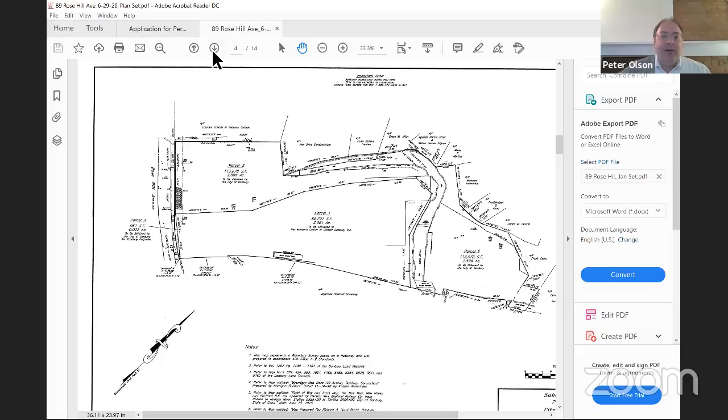All of the activities on our site plan, shown on plan number 5, are within 200 feet of the Still River, and therefore are all regulated activities. However, we're not proposing any work in the Still River except as Abigail will detail. The wetlands themselves are just right along the edge of the river, so it's the river and a tiny, tiny bit of additional wetlands next to it.

The remediation plan was overseen by a licensed environmental professional pursuant to plans approved by both the state DEEP and the Department of Economic and Community Development, who provided the funding for the city to undertake the remediation program.

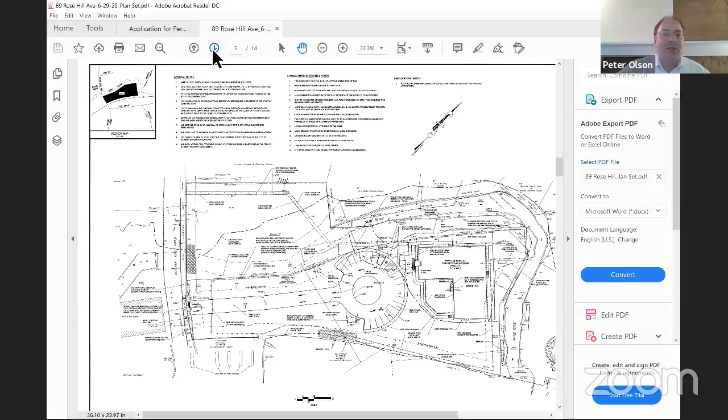So with that, I would like to turn it over to Abigail Adams to go through the site plan and the landscaping plan, which I think is page 13. I'll forward it down for you, Abigail. No, Peter, I'm going to give a little bit of background so I can share my screen and go through the sheets as I have set up, if that's okay. Got it. You got it, I stopped sharing, so I'll tell you.

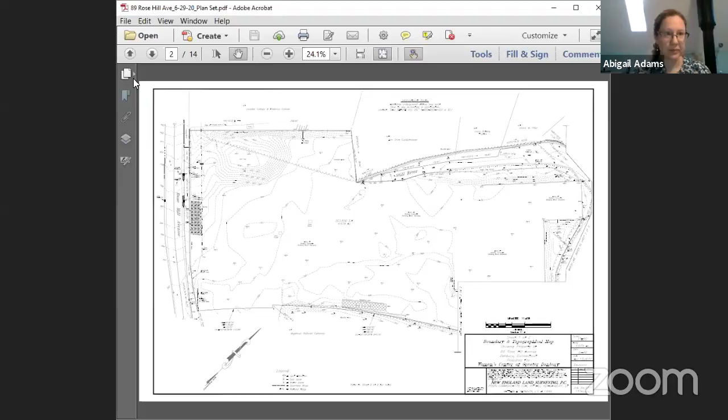All right, share screen, here's my plans. Come on, sorry, it's being a little difficult. And my computer's going to be difficult, because why not?

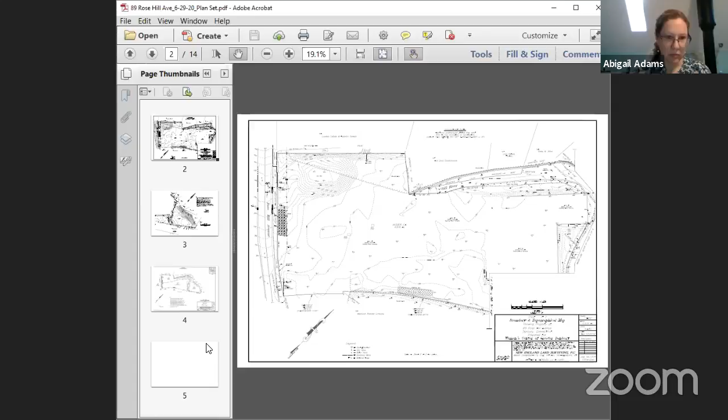Okay, well, as we start, good evening everyone. For the record, Abigail Adams, registered landscape architect, owner of A2 Land Consulting, New Fairfield, Connecticut. I am going to give a little bit of background on existing conditions and what we are proposing, and then I will pass it over to Mr. Doto to get into some of the DEEP process and whatnot. Sorry, my computer's got a little bit of feedback.

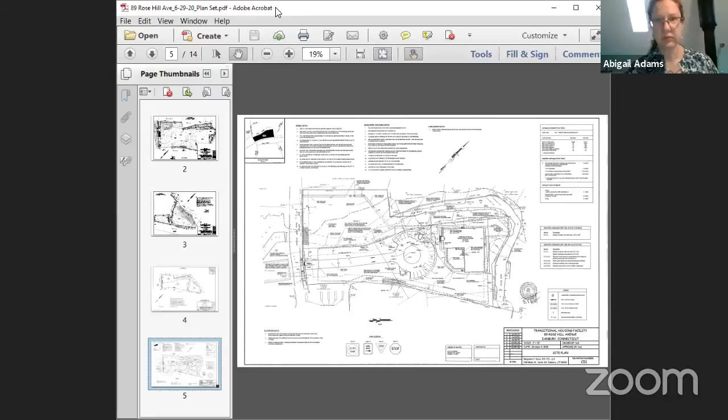I think everybody knows where the site is located, on Rose Hill Avenue, sort of to the northeast side. We're bordered to the southeast by the railroad tracks. As Peter mentioned, we've got the Still River, which enters the site via a culvert here at Rose Hill Avenue, moves through the site along here, daylights again up at the top of the property, moves around, then bisects the site again and flows down to the southeast here.

Wetlands, for the most part, follow the edge of the river. There's flags shown on the plans.

These were flagged by Davidson Environmental in April of 2018. As their report states, wetlands and water courses present consist of the Still River and small areas of bordering alluvial floodplain soils. This is an urbanized and channelized segment of the river with portions of the riverbank bordered by stone retaining walls. Every once in a while we've got a little bit of wetlands running up past the channel of the river, but it's few and far between. Mostly the edge of the river is the wetland area, the extent of the water course.

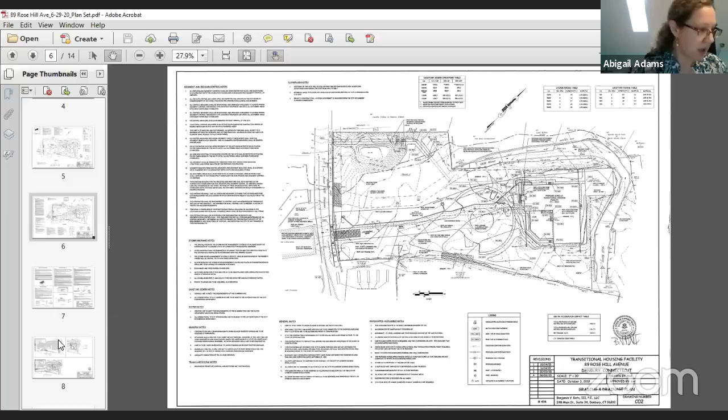Moving to sheet 8, if we take a look at sheet number C04, you'll see the pre and post development impervious area hatched here. This is pre-development, that's the factory and other concrete areas. And then you'll see our post development here. There's no net increase in impervious area as part of this proposal, which is why the overland flow and no drainage structures works out so nicely here.

Overall, we have a net fill of approximately 270 cubic yards of fill. In terms of utilities for the site, city water and sewer are available in Rose Hill Avenue, and we are proposing to connect to those.

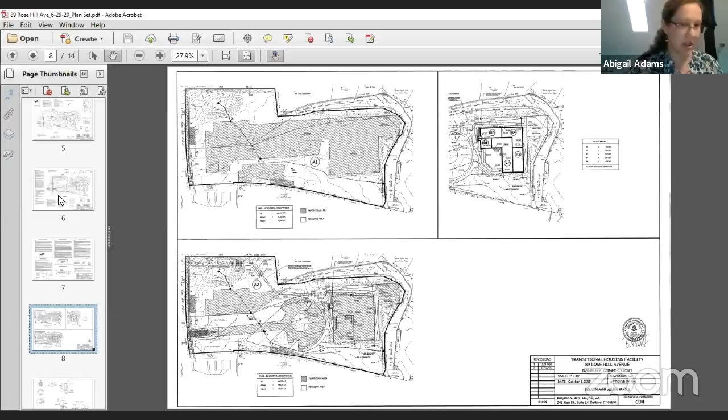I'm just going to briefly move back to sheet number 5, the site plan, which indicates the various 100-year flood limits of the floodplain with varying elevations. You can see we have various ones throughout the site here, again at different elevations. As you can see, a significant portion of the site is located within the 100-year floodplain.

Tighe & Bond was retained to conduct a flood study, and essentially the entire design of this site, what is being proposed, has been dictated by this study.

And the proposed building is situated at an elevation well above the 100-year flood elevation. As part of that, a 100-year flood egress path is provided.

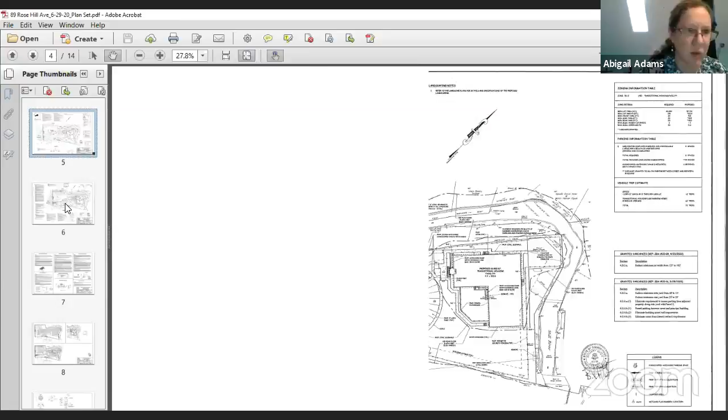We have a 100-year egress coming out of here, emergency egress. It comes up the slope here. This is a deck portion, so it's raised above that flood elevation, and then it becomes a concrete walkway out to the access at Rose Hill Avenue.

Mr. Doto will provide additional info on the lengthy DEEP process — he can give some more information on that. Now moving on to the landscape plan, which is always a fun and exciting part for me.

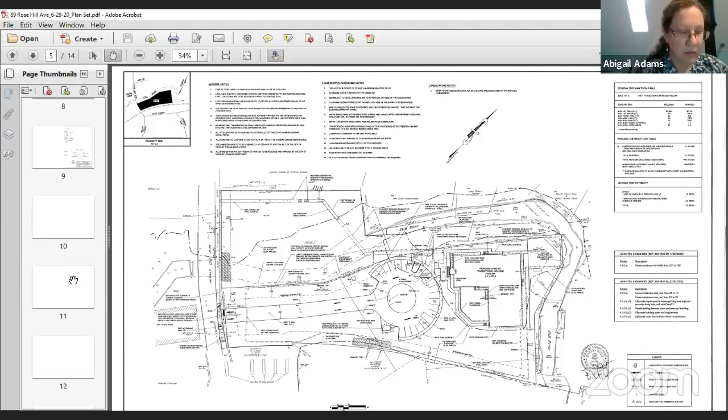Sheet L01 is the overall planting plan. As you can see, per regulations, we've got our canopy trees in the end islands. We're providing some screening for the transformer and for the refuse area, and some buffer plantings along the railroad side of the property.

To the northwest of the building, in the area that slopes towards the river, we are proposing the removal of remnant concrete and debris. There's one dead and falling tree here that's not doing so well, plus scrubby plant material and extensive Japanese knotweed taking up a majority of this area. We're proposing to remove all of that.

What we would do is replant with a roadside matrix seed mix consisting of shrub, grass, and perennial seeds, and let that do its thing. We'll also install a couple of varieties of eastern red buds throughout, some sugar maples along the river here, and some viburnums.

Again, with the seed mix and this new planting, the idea is to outcompete any of the invasives coming back in. I know Japanese knotweed's a tough one, but that's what we're really trying to accomplish there.

The same replanting treatment will occur on the northeast side where some remediation has happened. Again, we'll seed with the roadside matrix mix, shrubs, perennials, grasses, and some shrubs with an ornamental tree along the back patio. This large concrete area is to remain—it's retaining, and there'll be a fence around it. So nothing is happening in terms of construction in this area along the river.

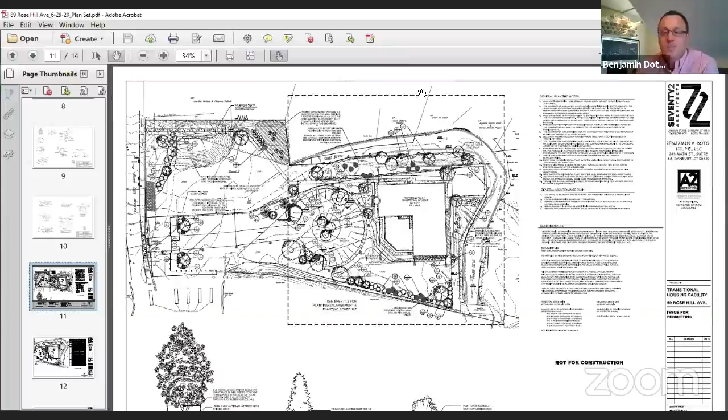Good evening everybody, Benjamin Doto, licensed professional engineer. I'm here tonight representing the applicant. My role on this project was, as usual, the civil engineer, but in this case it ended up being more of a flood and grading engineer than anything else, because the floodplain that Abigail and Peter mentioned and the Still River really dictated the design of this site and our approvals with the DEEP, which was required as part of this.

We worked extensively with Antonio and the engineering department to coordinate the remediation plan along with our site development. That didn't just include the remediation and site development—it also included the cut and fills and the grades that we're going to be at today.

For those of you familiar with the site, if you were to look out there today, you basically see a slab occupying the majority of the site. That slab is going to be removed—portions of it have already been removed as part of the remediation in areas they've remediated. The site is going to be developed as shown.

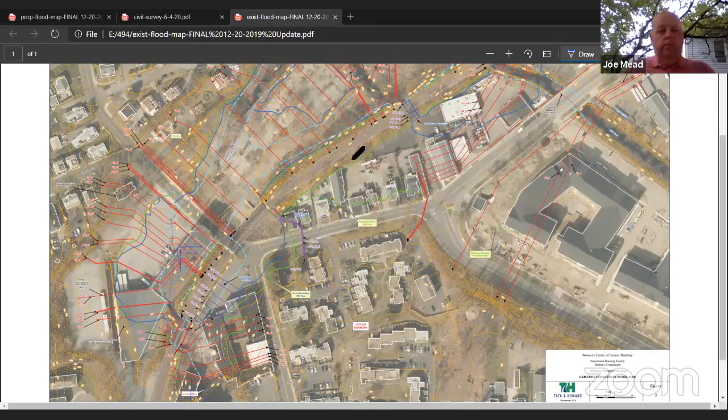This is called the existing flood map. To get a sense of where we are - here's Fairfield Processing. Our site is right here, Rose Hill Ave, and the railroad tracks. All these blue lines here are the Still River - the light blue are the floodway, the dark blue are the floodplain.

The Still River, for those familiar with Danbury, runs over a dam behind Kingswood Kitchen, goes in overland flow, under the railroad tracks, flows under Fairfield Processing's building through a culvert, under Rose Hill Ave through an on-site culvert, then again open channel through most of the site, only to enter another culvert along the railroad tracks before it comes out on Rose Street. This portion of the river was not improved when the Army Corps came to Danbury years ago and redid the Still River through Danbury - that process started somewhere around here and went downstream.

All these red lines here are actual cross sections that were part of our model.

As Abigail had mentioned, when we first looked at this as an alternative, we first looked at trying to put the building up toward the front of the site here and the parking behind it. It simply didn't work with the flood model, because the way the water flows here during the 100-year event, the water is not just restricted to the Still River channel. What ends up happening is...

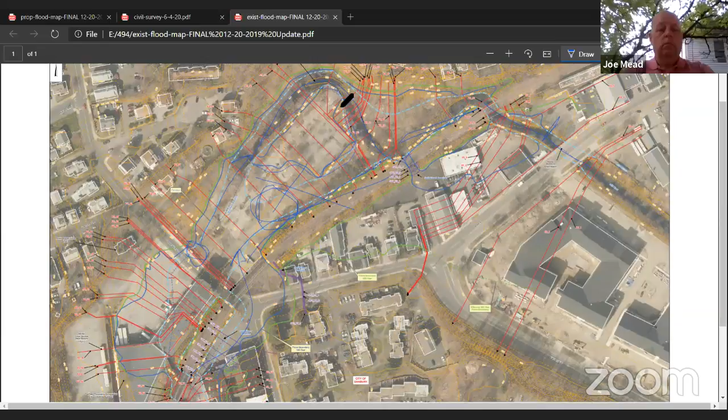100-year flood waters bubble out of the Still River. They flow down Kingswood Kitchen parking lot under the railroad trestle. They leak out from the opening at the Still River Bridge, and water runs both in the river and across the site here on the railroad tracks. There's an area, if you can see, I'm tracing it with my pen right now, right here, that is outside of the 100-year floodplain. It serves almost like an island, if you can imagine, when the 100-year storm were to occur.

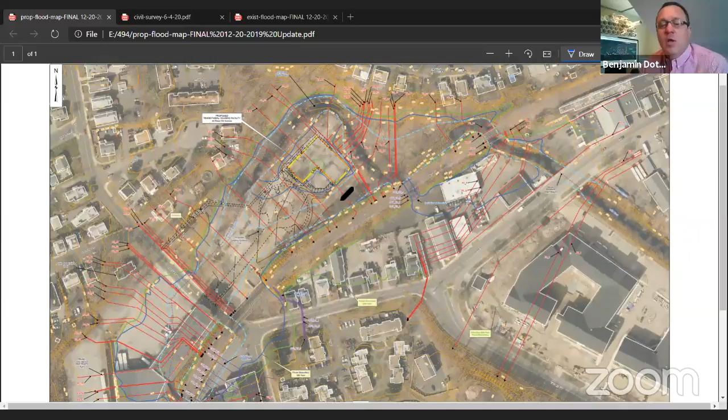So to go to the proposed flood map, you can see the conditions here where we have our building currently located, right here. We had to locate this building in this location - any other iteration, location, or alternative simply didn't work.

So here we are - when you get the 100-year storm now, the building is located in a spot that's dry. Portions of the site will continue to flood like they do today. As Abigail mentioned, we're bringing in a slight amount of net fill - that fill is primarily for the building. We're actually having about a 900 cubic yard cut in the floodplain.

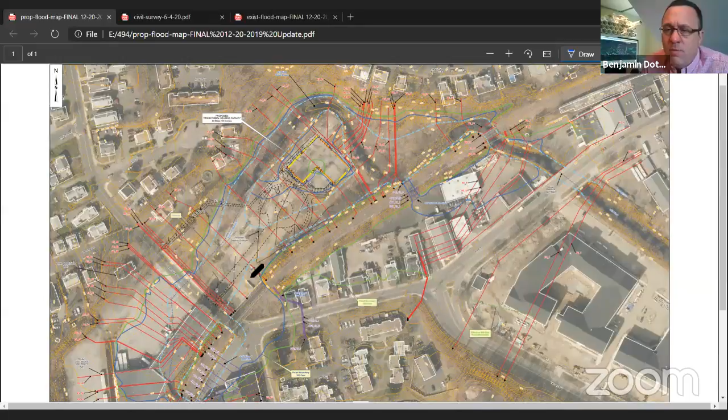So the end result with this project is more flood storage, and there will be no increase in 100-year water surface elevations on site, upstream, or downstream as part of this. That was the criteria that the DEP and the city of Danbury have for a floodplain permit. The building itself will be set 3.5 feet above the 100-year floodplain elevation - we're only required to be 1 foot above it, so we're conservatively above that. In fact, we're 1 foot above the 500-year floodplain elevation with this design.

So to get a sense, if you were to go out to the site in the back corner where you see the slab that's over where the building is, our building is going to be 3 feet above that existing slab. The grades are going to be what they are out there today - you will basically walk up 3 feet to the building, and it'll be handicap accessible.

As Abigail mentioned, we do have a 100-year egress path. This is required by both the city of Danbury and the DEP for egress in the event the 100-year storm occurs and there are people in the building - they can safely walk out without having to be rescued by a boat.

Put it that way. The drainage design with this site ended up being a low impact drainage design. It sort of happened - I'm flipping to the grading plan now, but to get a sense of what we have out there, I'm going to go to the drainage area map.

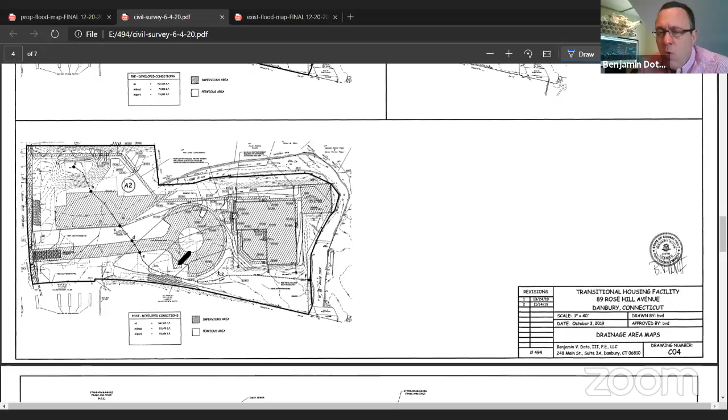Right here, right now, you can see the existing slab, and that slab pretty much covers a good portion of the site. When we're all said and done, we'll have a lot less impervious area, so mitigating runoff is very easy on this site because we're simply reducing the impervious area.

What became a little more challenging was making the site work to marry with the remediation plan, and also to keep in mind one of the things the DEP wants, and I think the Wetlands Commission wants too, is a low impact design. You don't always get to see it in an urban area.

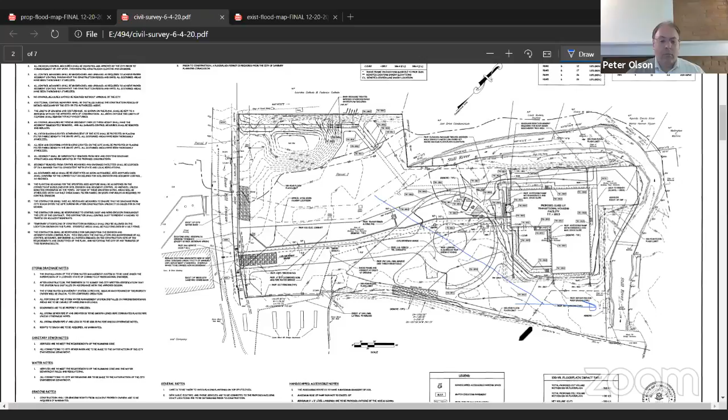This site has no curbing. It has no catch basins. It has no pipes that lead to the Still River. The site is graded to gently flow across the site, and drainage patterns continue overland, through a grass and meadow landscaped area into the Still River.

Our roof drains discharge onto energy dissipating pads. So I did lie, we do have some storm piping. We have some 6-inch roof drains that discharge onto the ground. We're not sending any pipe directly into the Still River. So we have natural attenuation ways to do this.

This was something during the DEP process. They had a questionnaire, among other things, related to the Still River. We had questions and criteria where they wanted to see a low impact design as opposed to a traditional pipe-to-pond system that you tend to get in a lot of urban areas.

This actually worked very well, considering that we had to remove soil. A lot of times when you remove soil, it's harder to make your storm piping work with your grades and pitches. But it also helped that the site had some remediation done, so we don't have to go back and dig up areas that are deemed okay per the remediation plan. So it was sort of a win-win situation.

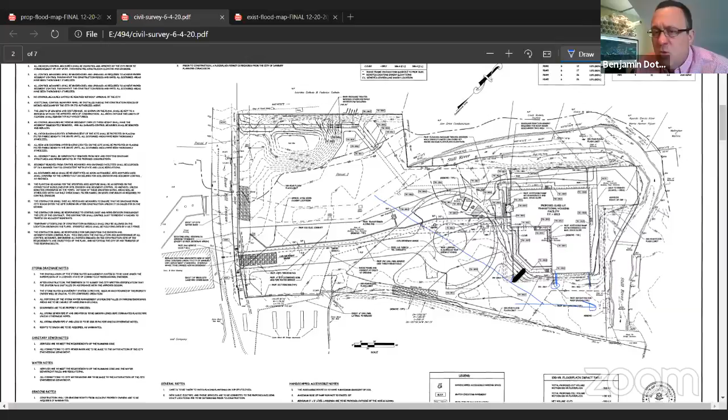We ran the storm drainage. The city of Danbury requires we run a 25-year storm. The DEP asked us to run a 2, a 10, and a 100-year storm. We have reductions in overall runoff for all of those.

The site will be served by city water and city sewer. We're going to bring in a water service to the site. It'll be a combined fire and domestic service, and the building will be sprinklered.

The sewer actually already exists on site today. There's an old manhole here that we had jetted out that still works, and it's tied to the city of Danbury sanitary sewer system, so we're really just going to connect to that. The site will also be served by underground electric and underground gas.

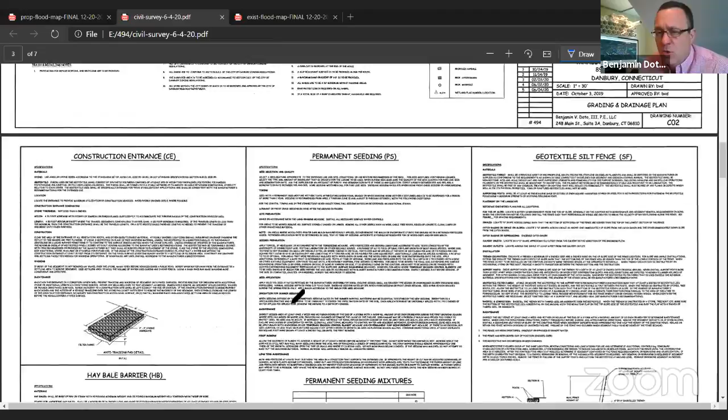That's really all I have for my presentation. Like I said, this was a little front loaded because of the DEP floodplain approval, which was a lot more than the floodplain. It included drainage, but it also included a sediment and erosion control plan, with sediment and erosion control notes and details. That was all done and is going to be part of this application. I'll be happy to answer any questions anyone may have.

As Antonio had mentioned, I was at that meeting earlier this spring when he got the permit for the remediation on the site. He said that once the remediation was completed, we would be coming next with this phase of the project, and here we are today.

Thanks, Ben. Thank you, Ben. Anybody have any questions? Well, Peter, I'm sorry, go ahead.

Sure, I was just going to sum up, if you don't mind. As I said earlier, every activity that we proposed on this site is a regulated activity because it's located within 200 feet of the Still River. However, we don't believe that what we're proposing constitutes a significant activity.

And there's three reasons for that. First, a lot of the site work has already been accomplished pursuant to a prior permit that you issued to the city for their work in remediation part one. Second, the entire site, almost as Ben showed you in his plan, is currently covered by a concrete slab. Some has been removed, and we're going to be removing more, replacing it with our proposal. Third, the design incorporates elements of LID, as Ben talked about.

So because we don't believe this is a significant activity, we'd like to ask that you act on it without a public hearing. And as Ben noted, we're happy to answer any questions and deal with any reviews that you have. That's all I have.

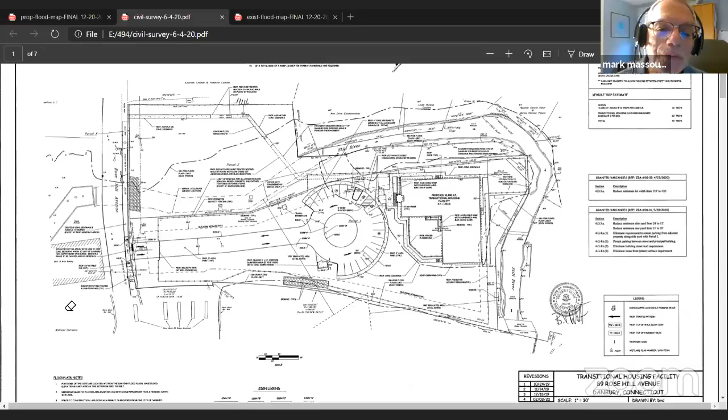I saw you mentioned provisions for pedestrian movement off of the site in a 100-year flood. With regards to that, would there be any plan for parking of cars, or potential flooding issues with a vehicle being left or flooded on the site?

Yes, that's a good question, Mark. I failed to mention that. Part of the DEP approval process included a flood contingency plan, which I can give you guys a copy of if you want, but I can summarize what happens here. The staff at this facility will all be trained and made aware of the plan that exists, and this is part of our DEP permit. It was a requirement among submittal, along with the flood analysis and drainage analysis, that an emergency management plan be prepared.

Basically, Mark, when a big storm is coming, we know about it, especially with a watershed like the Still River. We know a day in advance, two days in advance, a week in advance if you're watching the Weather Channel. When certain storm events are predicted, it triggers actions. When anything over the 50-year storm gets triggered, there are certain things that need to be done. At certain rainfall levels, the automobiles will be evacuated from the site when we know the site will flood. And when I say the site will flood, portions of the parking lot will flood - that's a given, as I mentioned, it's 3 feet below.

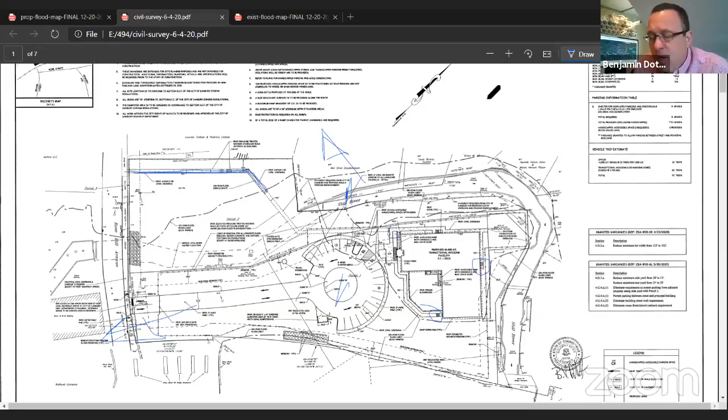But say, for instance, you were sleeping there and the 100-year storm came - in theory the cars would already be removed from the parking lot, but you'd be safe and able to walk out that path, or someone would be able to come down that path and help you out.

And that's the whole intent of the regulation - it's not to create an island of stranded people. Did I answer your question, Mark?

You did, and more. I was going to follow up and say we all know in this day and age that the 100-year flood is becoming more commonplace, and we're talking now about greater than 100-year floods, almost up to a 500-year flood. So certainly those kinds of precautions need to be in place. It's almost like the 100-year flood is becoming the minimum to design to in order to keep folks safe.

Exactly, Mark. And just to make you feel more comfortable, we set this 3.5 feet above the 100-year flood and 1 foot above the 500-year flood, which is more than is required, but as the design engineer, it's what I felt comfortable with doing.

Now, the other thing was when the DEP asked us what drainage numbers to use, Mark, we used this NOAA Atlas 14 Volume 10 version 3, which are numbers higher than traditional Connecticut Department of Transportation runoff curves. They reflect the higher intensity storms you're discussing, Mark.

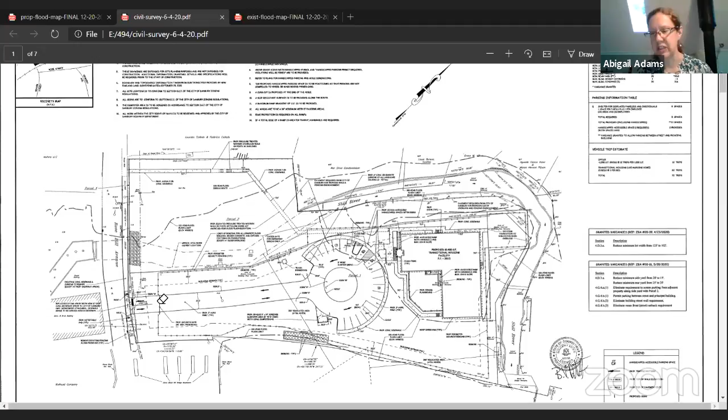I think I will have to discuss that with Peter on how we will deal with that, because all of that invasive removal is actually happening on what's going to be City of Danbury property. It will not be owned by the Women's Center. So I need to figure out logistics and talk to Peter about that. I don't know if you have any thoughts off the top of your head, Peter, of how we could do a maintenance plan or follow up on that mitigation.

My proposal, back when we decided to split the lots, was that there would be an easement in place that would allow the Women's Center to enter onto parcel 2 and use it. There's a lawn there, and also we have our emergency egress there, so we need an easement for that. But also that we would have the ability to install, maintain, repair, and replace fencing and landscaping. So invasive removal will be part of that easement as part of construction, but also part of our maintenance going forward would be to make sure we keep it clean.

I don't have a formal easement document yet, but I have discussed it with City Council. I think to help with that, I could prepare a maintenance plan for that specific area and for the invasives, so we can keep on top of that. I know Japanese knotweed, they're all horrible, but it's not an easy one to control.

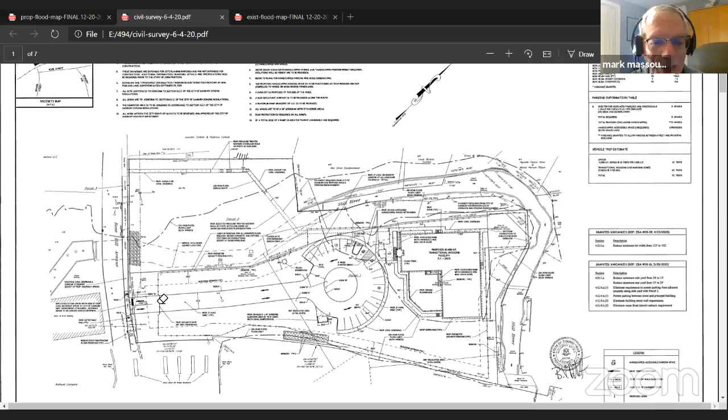Yeah, no, absolutely, and I agree that it is a difficult task. I just like to look forward a little bit and have something in place so that the entities can fall back on some guidance if it does get out of control. Sure, yeah, we can definitely draft something. And we can build that into some conditions of approval as well.

Well said, Mark, that's exactly what I was thinking. We could do that when we put together the conditions of approval - we can reference a plan to maintain or an attempt to control the knotweed because it is pervasive. Okay, great. Does anyone else have any questions?

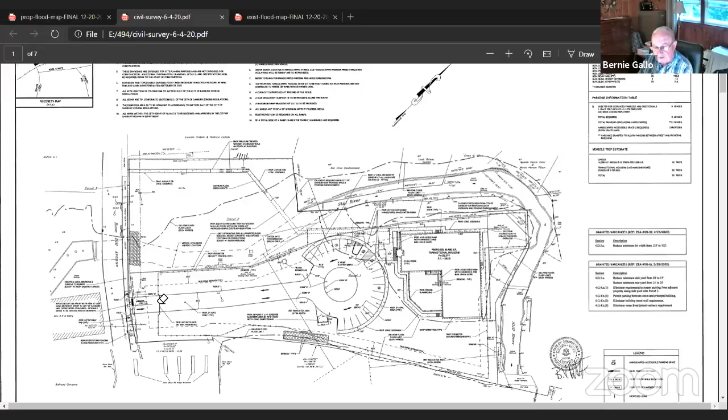Now's the time. Finding none, I need a motion to table this until July 22nd to give staff a chance to come up with a report.

I'll make that motion, Mr. Chairman. Do I hear a second? I'll second. Motion made and seconded to table regulated activity 1122, the Women's Center, until July 22nd, 2020, to give staff time to come up with a report.

Is that fine with you, Joe? Yep, I'll be able to get that done. Project impact report done with various conditions in there, and I can tailor those as necessary when Abigail comes up with a plan. Okay, I'll try to have something to you early next week.

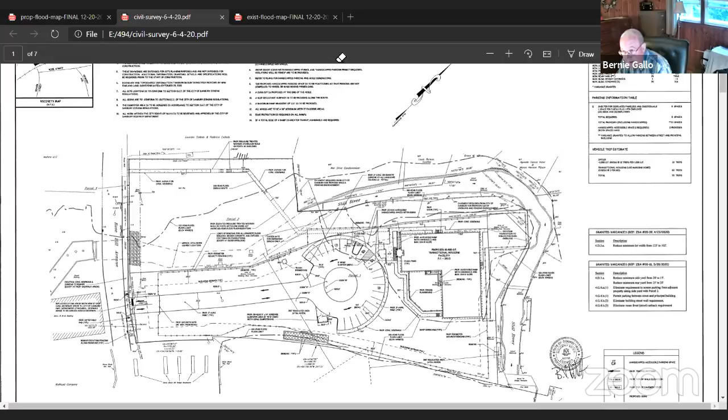Okay, that's fine. Those in favor of tabling it? Dr. Cronin, yes. Mary, yes. Jeff Harold, yes. Mark Massoud, yes. Alex Walk, yes. Motion carries.